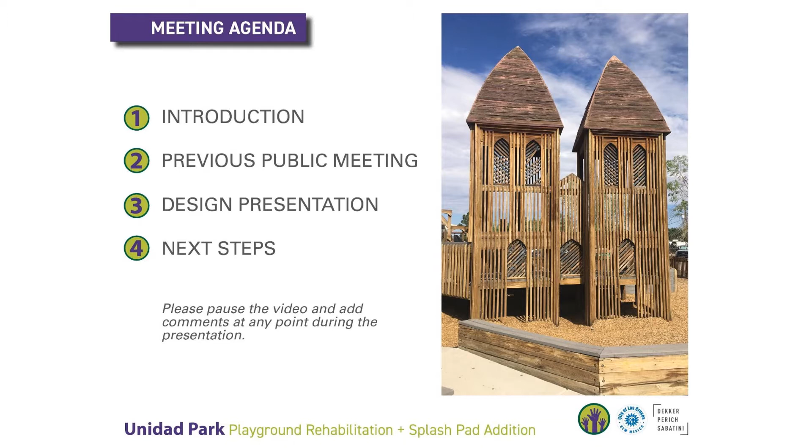This is a virtual public meeting, which is unusual. The city has created this venue to both inform the community about the project and solicit community input. So please pause the video and add comments at any point during the presentation.

Unidad Playground was built approximately 20 years ago as a community-built project with community funds. The designers integrated the extensive community input into the design, and community members and businesses contributed to the construction of the playground with volunteer labor and other donations. The result was a unique and memorable play environment that has provided joy to the community for the past 2 decades.

As time passed, the high desert sun was hard on the amazing wood play structures and equipment at the park. Now, renovations for proper safety and rehabilitation to allow proper maintenance and accessibility are required. A bit over $1 million has been allocated for the park playground rehabilitation and splash pad. While that may sound like a lot, there is a lot to rehabilitate. The city and design team are working diligently to make the most of funding, with discrete safety and accessibility improvements and focusing most of the funding on safe, fun, and accessible replacement play equipment and the splash pad addition.

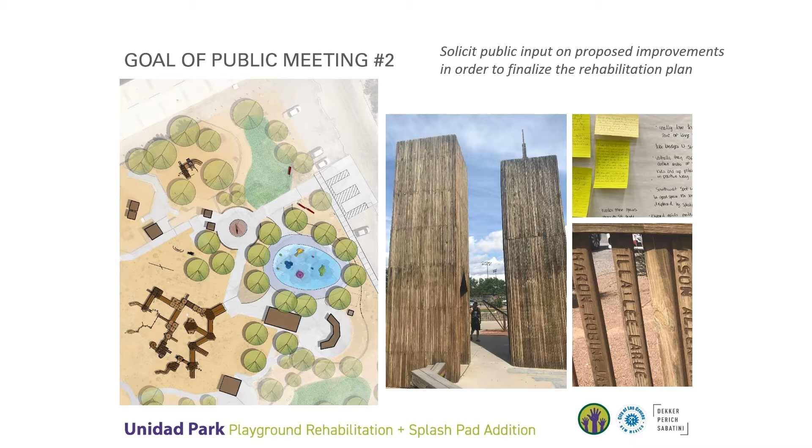So what is the goal of public meeting number 2? It's to solicit public input on proposed improvements in order to finalize the rehabilitation plan.

The first public meeting for this project was held on Saturday, February 22nd. Due to rainy weather, the open house style presentation was set up at the Meerscheidt Recreation Center. Signage was set up at the playground to direct people to the meeting. City representatives, including staff and leadership from Parks and Recreation and the project design team, were on hand at the rec center and on the playground to listen, take notes, and talk about ideas.

Presentation boards with images were set up around the room. The boards included images of the park components and an analysis of problem areas, precedent studies of similar community-built playgrounds and their renovations, and ideas on the extent of improvements that needed to happen as part of the project. Surveys were also available for people to fill out.

As the weather improved, several design team members walked over to the playground to talk with families who were using the park and hand out surveys about the playground rehabilitation project.

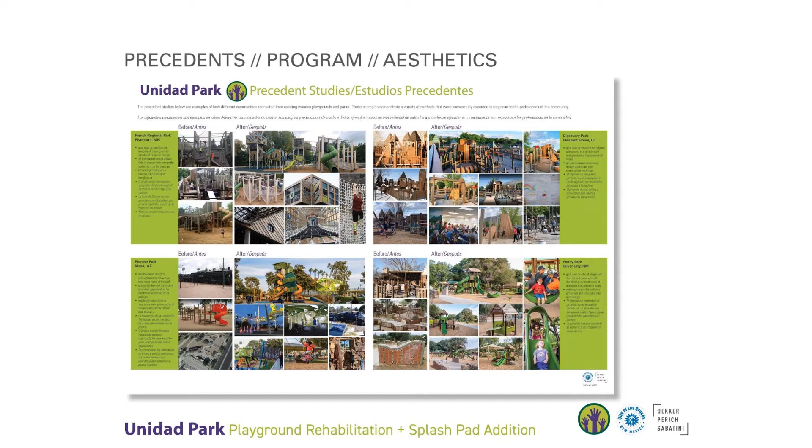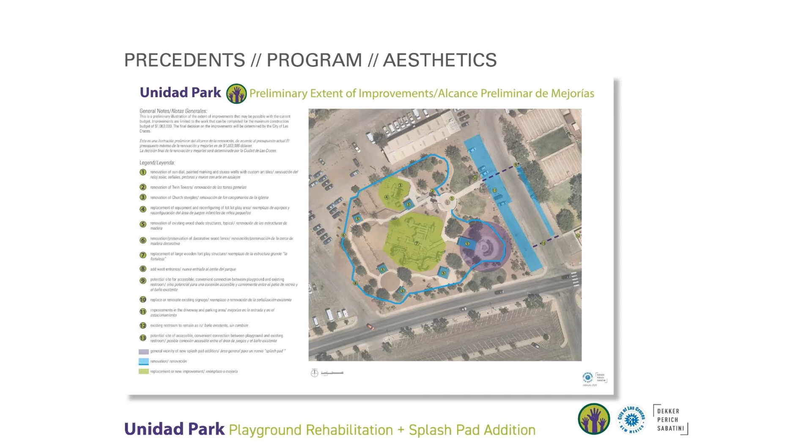The public meeting provided an opportunity for participants to gain an understanding of the scope of the project and share their thoughts on the ideas being presented. In addition to staff and the design team taking notes on mounted pads of paper, community members could write their own thoughts on Post-its and the paper pads.

Community members also filled out surveys. Some filled them out at the park and the center, and some took them home and returned them to the city over the next few weeks. The city also solicited public input through their website, inviting community members to fill out the survey even if they did not attend the public meeting.

In order to move forward with the design in a manner that integrated public comment, the design team compiled the comments and surveys to create a summary of public comment. While there were many opinions shared, we think that the summary captures the collective tone and repeated comment themes.

Surprisingly, there was not a consensus on the splash pad addition. About half of the people who attended were excited to see this addition, and the other half were not. Of the people who did not want a splash pad, their reasons varied, including a need to conserve water, concerns about attracting too many children or transients, and concerns about safety.

There was, however, a clear consensus about wanting the replacement play equipment to resemble the existing equipment in aesthetics and imaginative play value. Community members also understood the need for equipment that would be more durable, easier to maintain, and more inclusive.

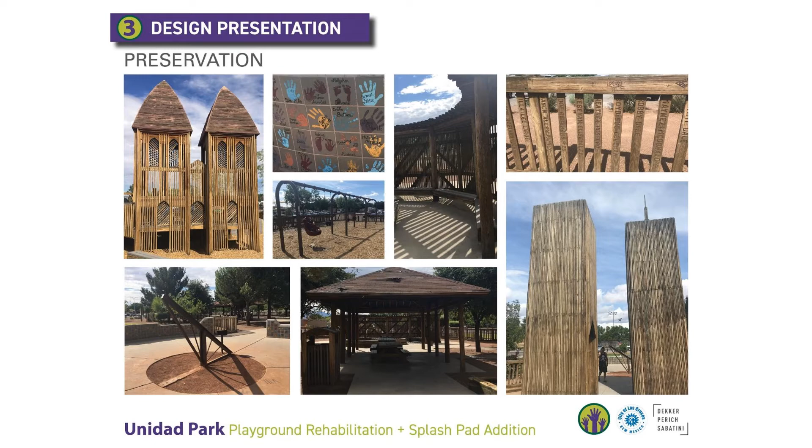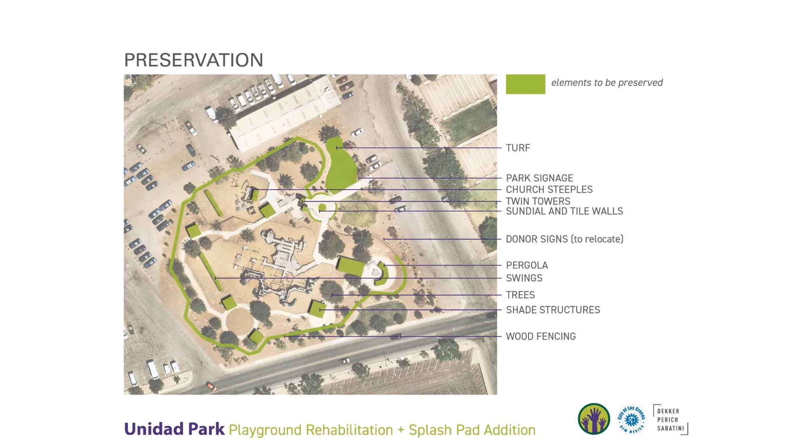We're also planning on leaving the existing swings and renovating the sundial, shade structures, and the wooden pergola. This slide is a plan view identifying the park elements that will be preserved, shown in green. In addition to the items noted previously, we're also preserving the turf area, park signs, and almost all of the trees.

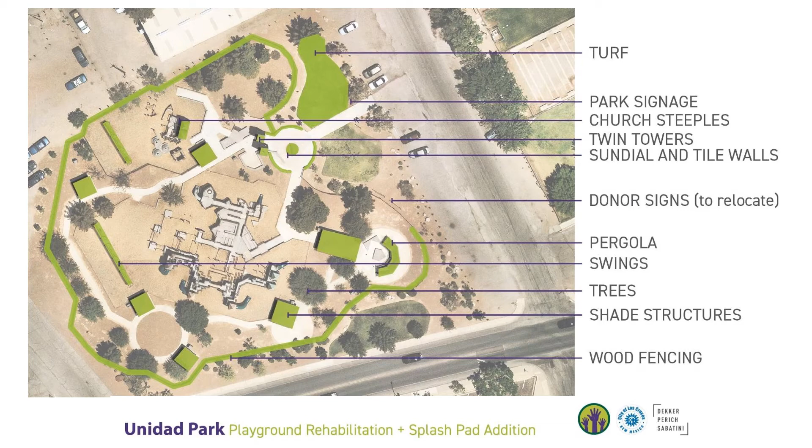Items being removed include the wooden play equipment, wooden play area curbs and seat walls, wooden platforms, and wooden decks. The turf area and a stretch of the decorative wooden fence are being removed to make way for the new splash pad. We had thought the splash pad could go in the southeast corner of the park, but there were conflicts with existing utilities in that area, so this new location near the entrance was selected.

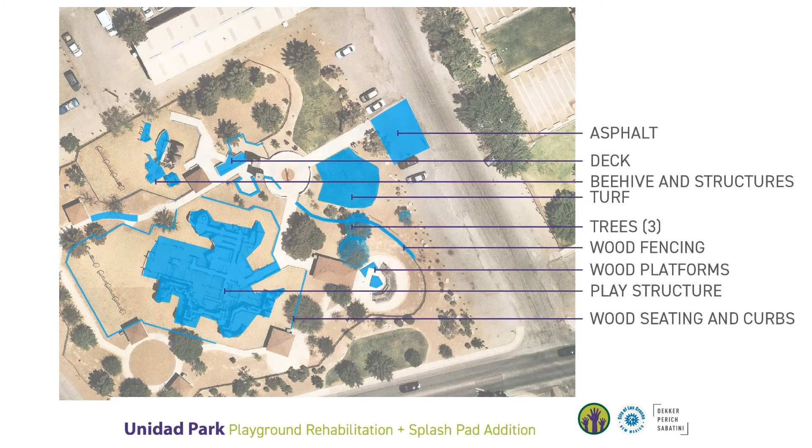Other removals will occur in the parking lot near the entrance to make way for new ADA compliant parking.

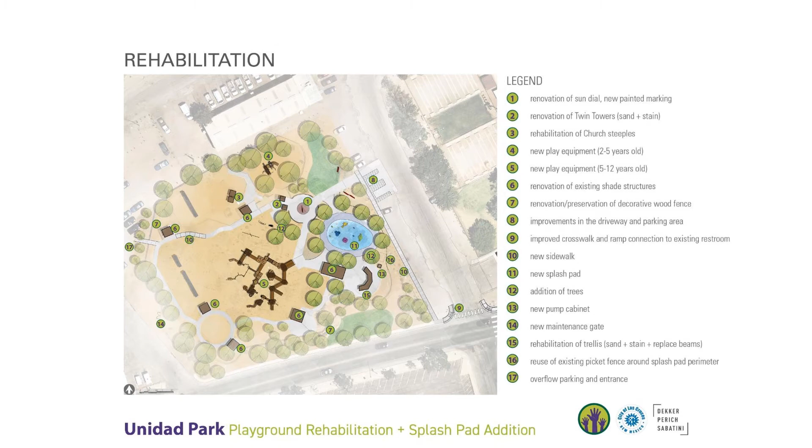This slide illustrates the park rehabilitation plan and splash pad addition. Let's walk through the list of proposed improvements. I'll use a laser pointer to point things out.

Number 1 is the existing sundial. We will be repainting the pavement and making some drainage improvements at the base.

Number 2 is the twin towers. We will be sanding and staining this with a semi-transparent penetrating stain and sealer.

Number 3 is the church towers. After the play equipment is removed, the base of the towers will be structurally supported. There will be some repairs made to the sides and roof, and it will be sanded and stained.

Number 4 is the new play structure for 2 to 5-year-olds. Number 5 is the large new play structure for 5 to 12-year-olds. Number 6 indicates renovation of existing shade structures, which might include re-roofing.

Number 7 is the renovation of the perimeter decorative wood fence. Renovation might just include replacement of broken boards, power washing, and staining.

Number 8 illustrates a new accessible parking area. Number 9 illustrates new accessible pedestrian ramps and crosswalk markings. Number 10 is a new concrete sidewalk to provide a safe and direct pedestrian connection to the park entrance from the street. Number 11 is the new splash pad.

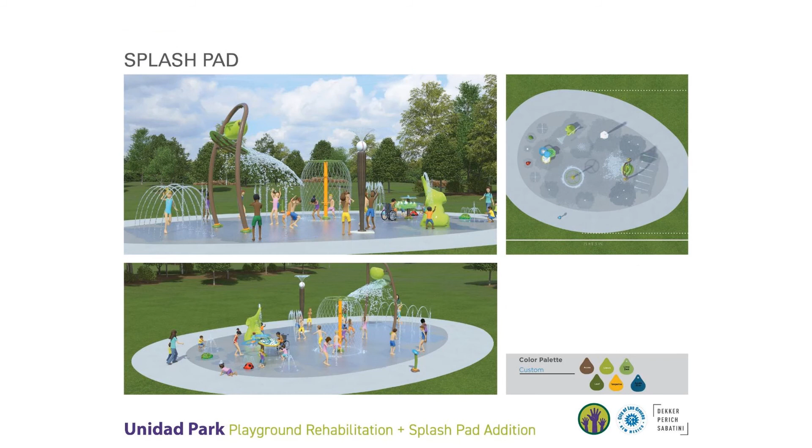These images illustrate preliminary ideas for water play features at the splash pad. The elevation at the bottom left illustrates how the features are designed for different ages, with a young children play area on the left and increasingly active and bigger features to the right.

The egg-shaped plan was selected to minimize tree removals and maximize the number of play features. The wet area in the center is surrounded by a perimeter dry area, and the surface will be covered with colored concrete that is designed with a non-slip finish.

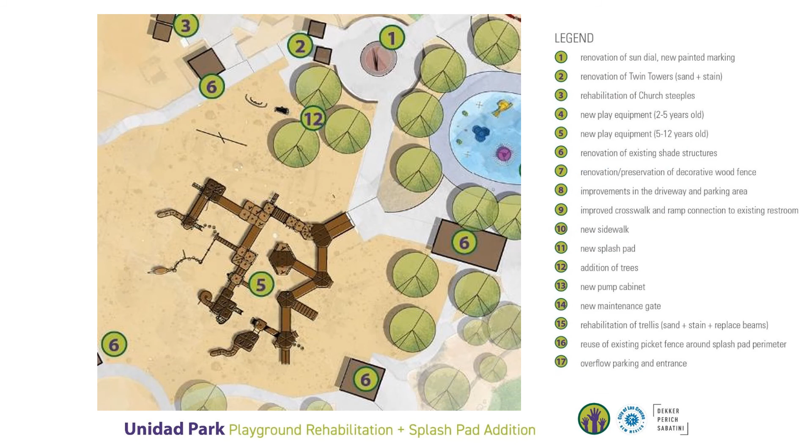A large new play structure is being proposed to replace the original interconnected series of wooden decks, walkways, bridges, and mazes. Number 5 indicates the location of the new play structure, which has been designed for ages 5 through 12. The design includes an accessible entrance along the existing sidewalk and ramped walkways and bridges extending for up to 80 feet in some directions.

A central accessible deck with bench seating is included in the center to serve as a home base, Valhalla, or center of the universe for the kids, and provide a place for parents to sit and observe the action.

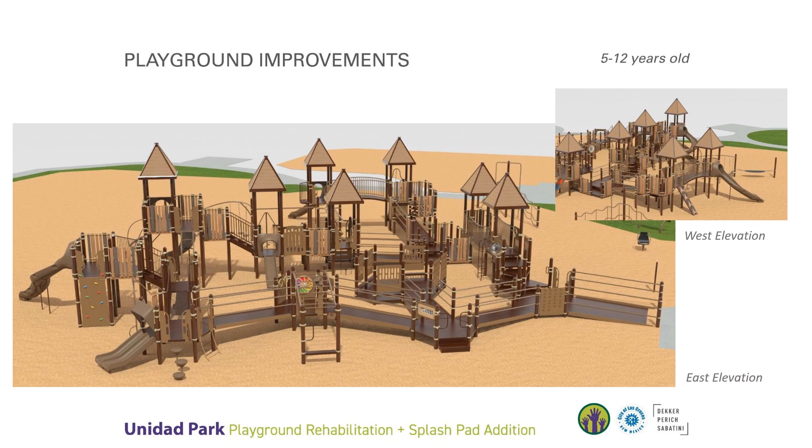These images illustrate the look and feel of the new structure. Note the accessible ramps, bridges, multiple access points, climbing features, decks, and slides. The diversity of play features and the resemblance to the original structure in aesthetics and connectivity are intended to help make this structure an appropriate, compelling, and more inclusive replacement for the original.

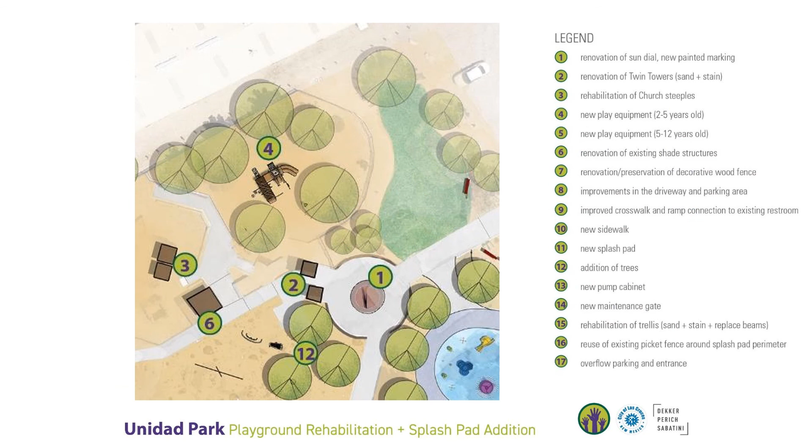This plan illustrates the rehabilitation plan for the north portion of the park, including new play equipment. Number 4 indicates the location of a new play structure for 2 to 5-year-olds. This structure takes the place of the old beehives, wooden boat, and adobe building. The play area will be accessible and covered in engineered wood chips.

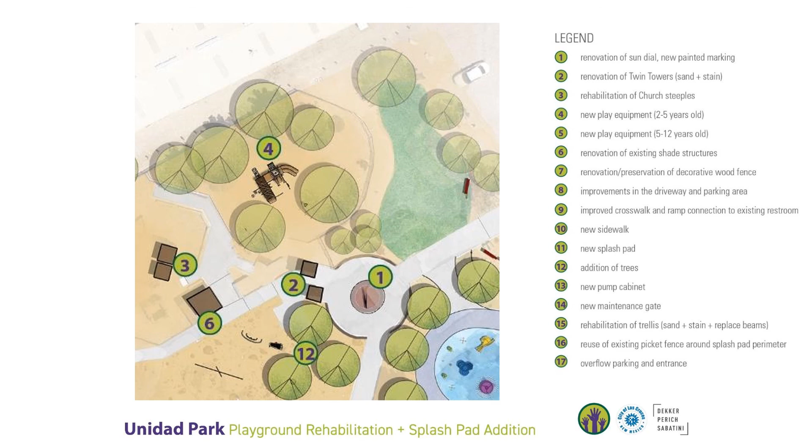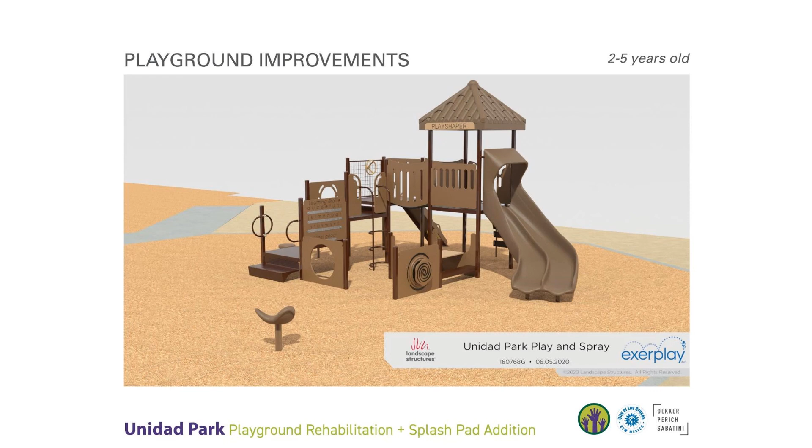The next steps on the project include collecting and summarizing public comment on this design, integrating the public comment into the development of the construction documents, presenting the final design to the public and City Council this summer, and then putting the plans out to bid and getting the improvements constructed.